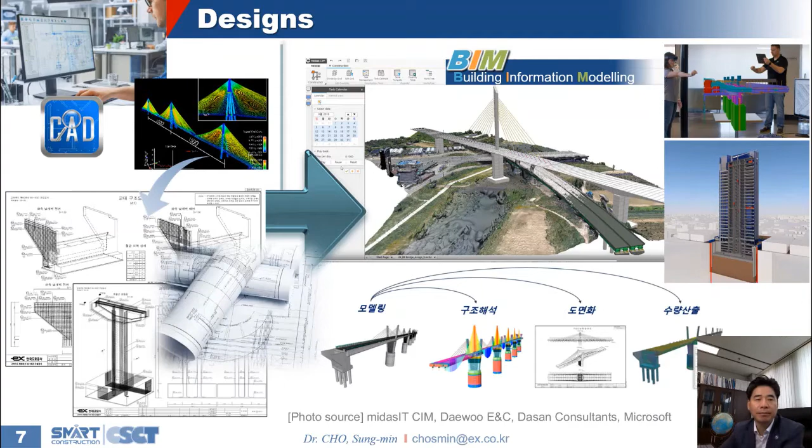How will smart construction change construction work? First, the 2D drawing-based design is changed to 3D digital modeling called Building Information Modeling, BIM. The current 2D design is changing to 3D design based on BIM. By using the property information contained in the 3D model, 4D manages the construction schedule, 5D manages the quantity and the cost, and finally, 7D management enables life cycle maintenance.

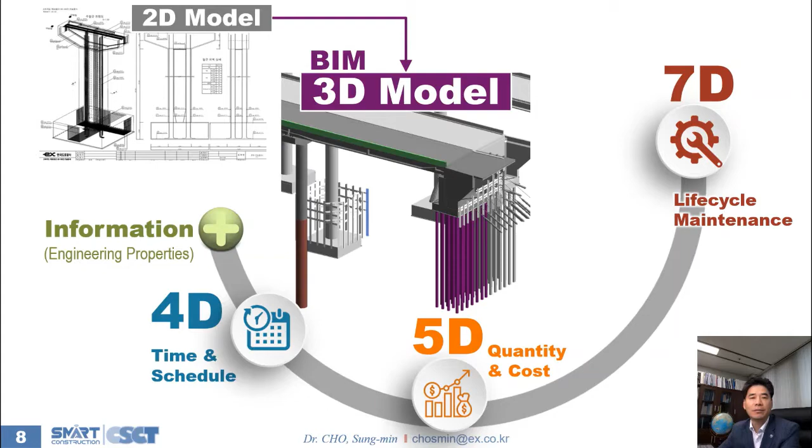I will introduce an example case of an application of BIM for interchange renovation works for road construction. The survey was conducted using a drone for the project area.

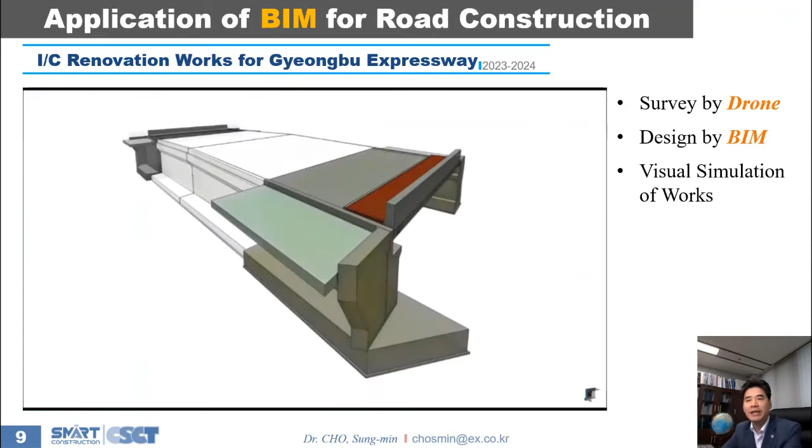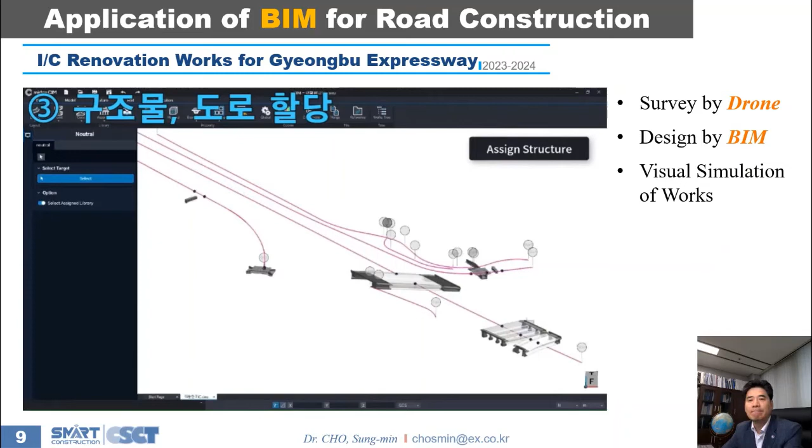For BIM design, first, the alignment and the geometry of the road were determined and assigned to the route. Next, the bridge was modeled, and this model was again assigned to the road routes. Then the earthwork section was modeled. The BIM result looks like this.

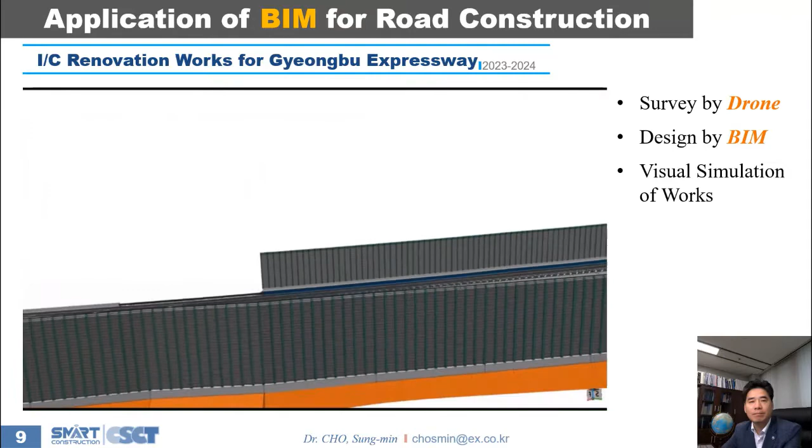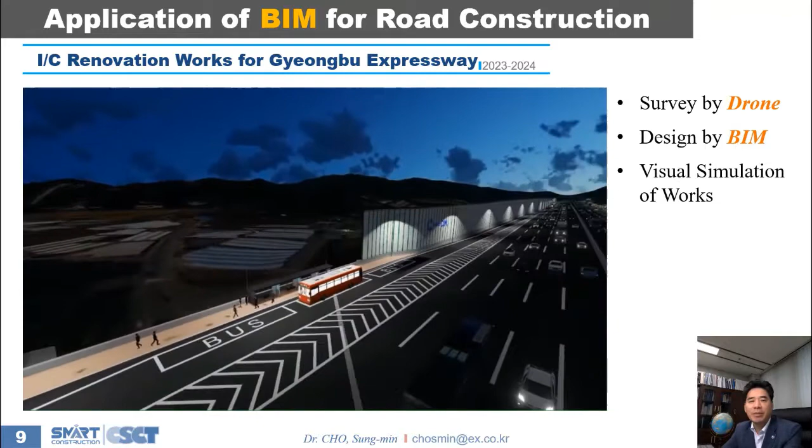We can visually check the location and the shape of the newly created ramp around the current expressway route. After the modeling has been completed, we can see the cars passing on the expressway in advance. In addition to daytime, it is possible to check the condition of the expressway by considering the lighting for each time zone at night.

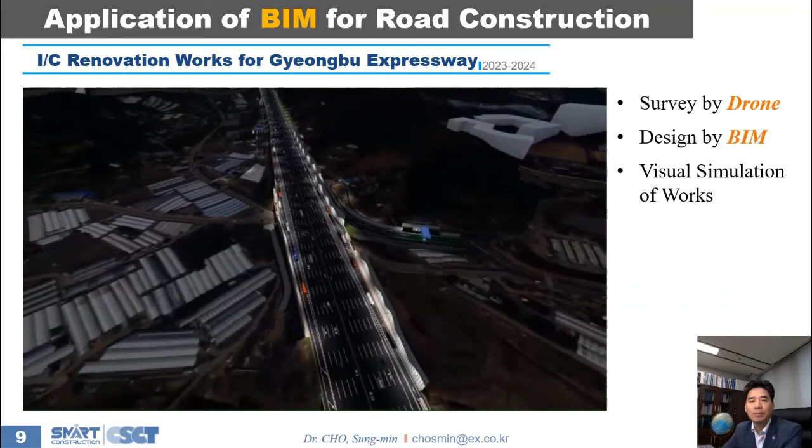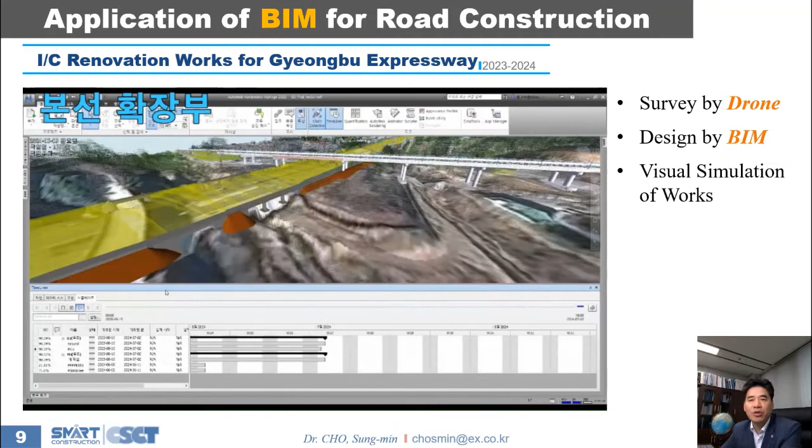Finally, it is the status of the work progressing according to the construction schedule, that is, a scene in which 4D management is performed.

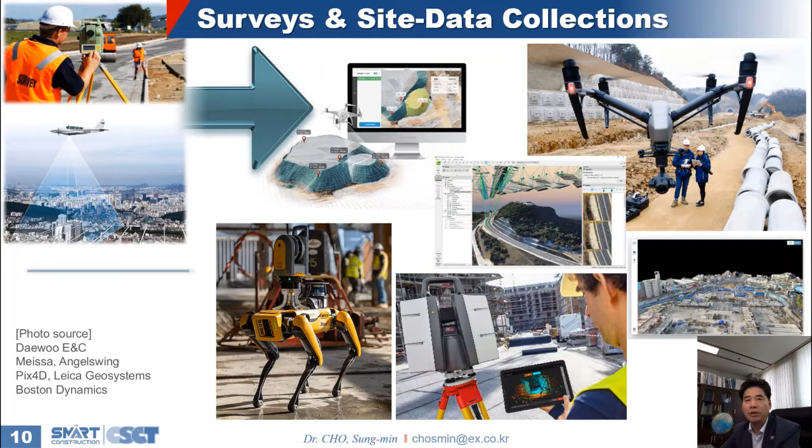Survey and data collection technologies based on UAV, UGV, camera, and LiDAR are evolving and improving rapidly. Instead of humans, drones and robots will create 3D digital maps and collect various information on construction sites. However, the abundance of solutions and systems available today can make it difficult to identify the best option for construction and civil projects. It needs to examine each system's benefits and limitations in construction management and civil engineering.

The use of mechanized construction equipment at construction sites is common. Furthermore, unmanned or remote control technologies using automated equipment are being used. We generally divide machine automation into MG, machine guidance, and MC, machine control. A trend in the industry is for guidance systems to become increasingly automated. The equipment used for earthworks is remotely controlled and autonomously operated. Graders and rollers can be operated autonomously through hydraulic system control, automatically following a set route.

Equipment put into the field is managed according to the integrated control system, and communicates with each other through pairing between equipment.

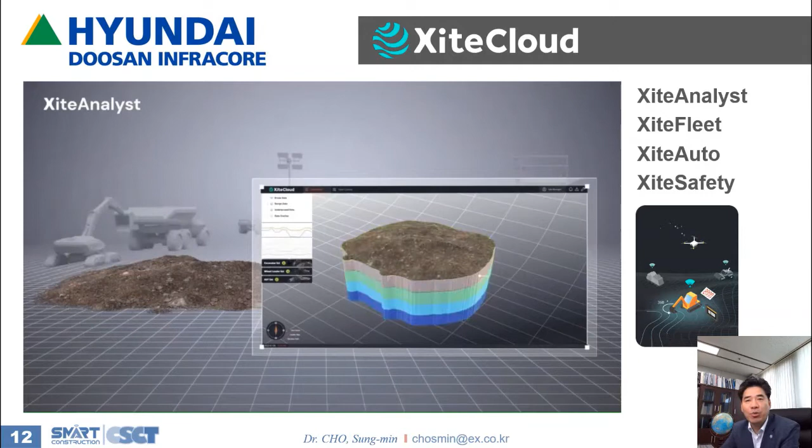XiteCloud, provided by a company that produces construction equipment, introduces digital automation technology. This digital construction platform supports management based on 3D visualization by integrating drone data, underground data, and design data, including fleet location tracking and operation monitoring in real time.

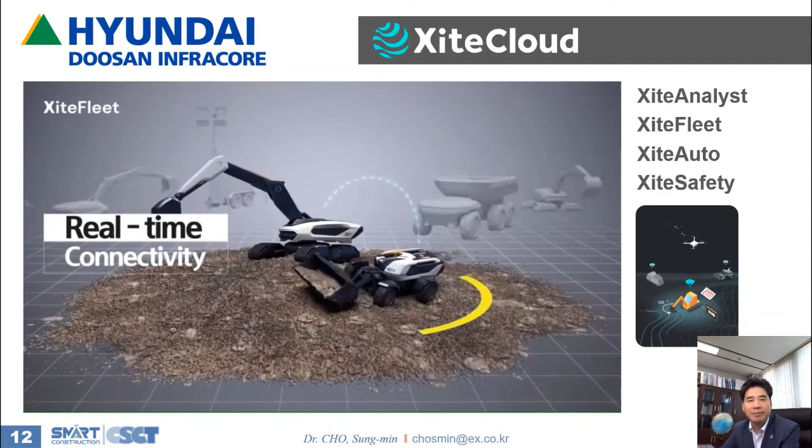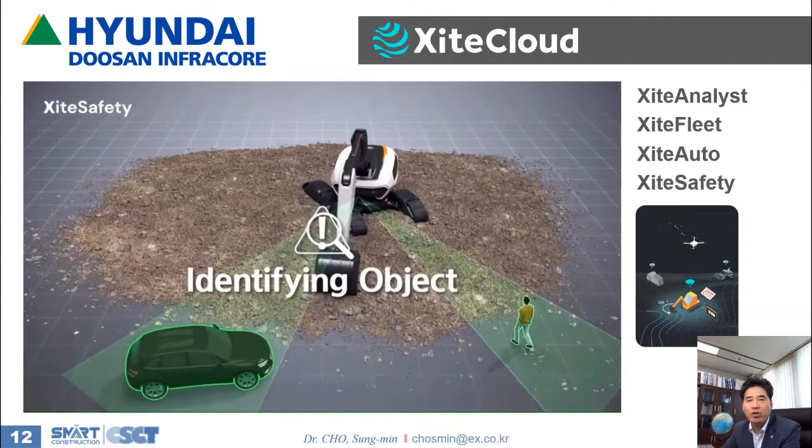XiteAuto is a construction automation system. 3D machine control combines 3D machine guidance with an automatic hydraulic control system and can be applied with a tilt rotator attachment. XiteSafety is a construction automation system that enables safety management by location tracking of construction equipment and workers with IoT technology.

The sequential construction phase is changed to a system in which design and construction are interconnected based on a digital model. In addition, off-site construction, meaning prefab and modular construction, is generally applied.

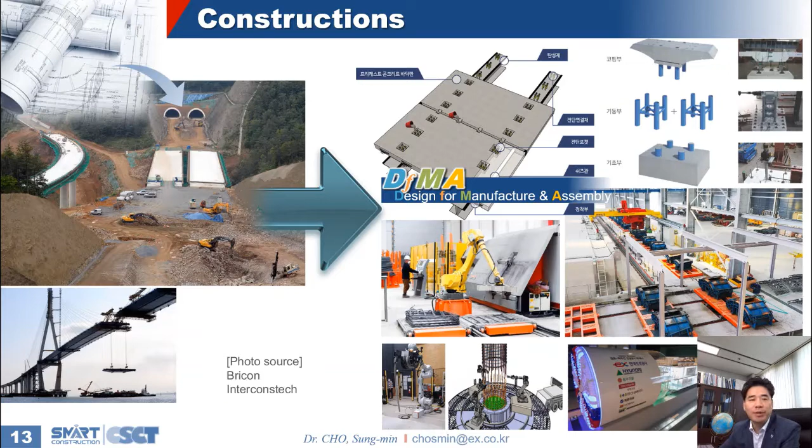The temperature during concrete placement was automatically recorded and managed using the temperature sensor and IoT communication installed in the rebar of the concrete structure.

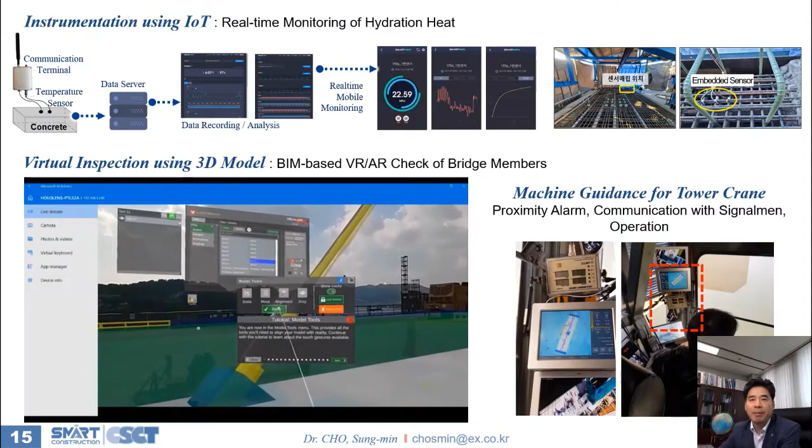Based on the BIM model, virtual reality was used to check whether the members of the bridge that had been constructed were made according to the design.

And the tower crane for the construction of a high located pylon was equipped with a sensor and communication-based proximity warning system and operated safely.

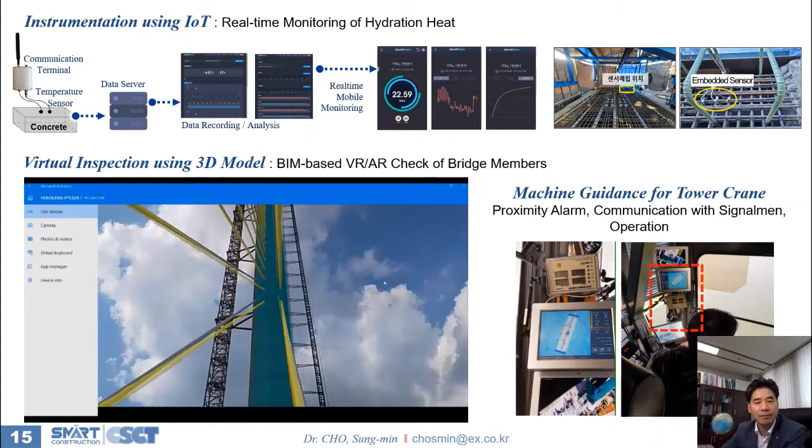A common data environment for collaboration based on BIM is also being operated for the first road tunnel construction under the Han River in Seoul, and integrated construction management using a platform consisting of a smart dashboard, digital twin simulation, and IoT system is also being used.

Web-based 4D simulation using BIM and workers' location tracking are also being tried.

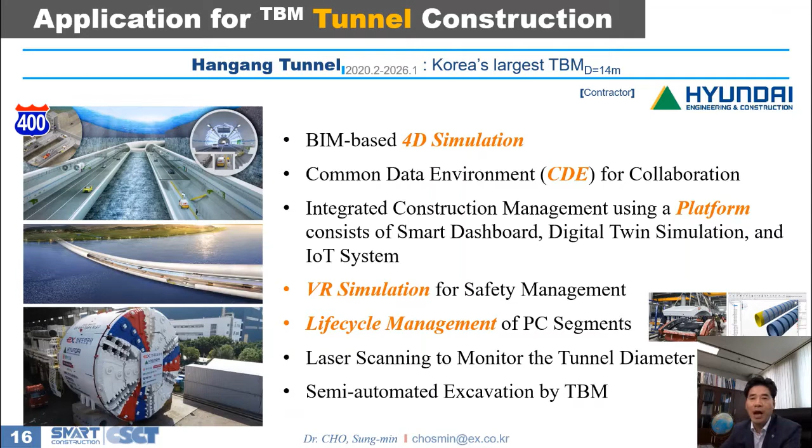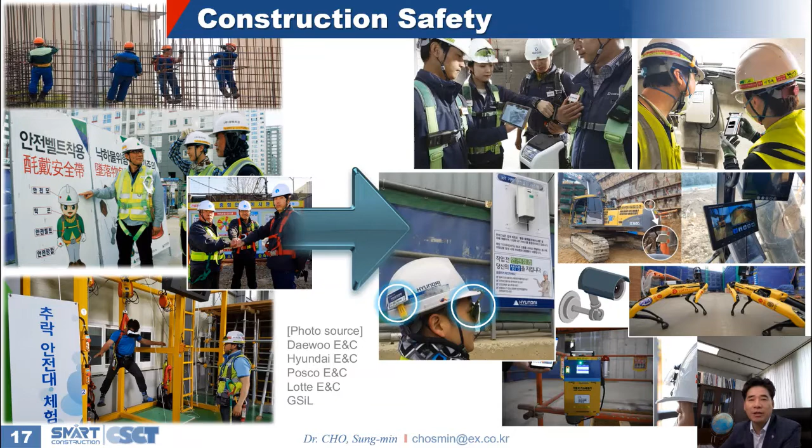Digital technology can greatly contribute to the improvement of safety in the construction industry, which is classified as the most dangerous industry due to many accidents during work. Various sensors, Internet of Things, and communication technologies will help increase the safety of construction sites. Virtual reality technology based on 3D digital models is very helpful in preventing accidents by educating workers before work.

Off-site construction cases using prefabrication and modular technology are also increasing. It is also used in PC segments of tunnel boring machines, tunnels, culverts, etc.

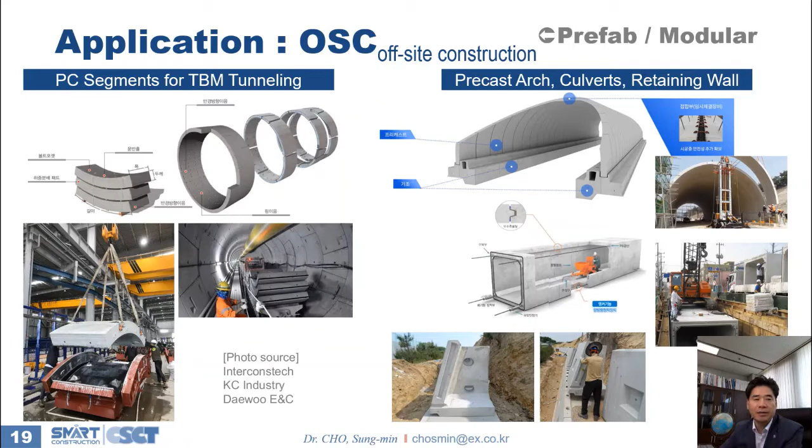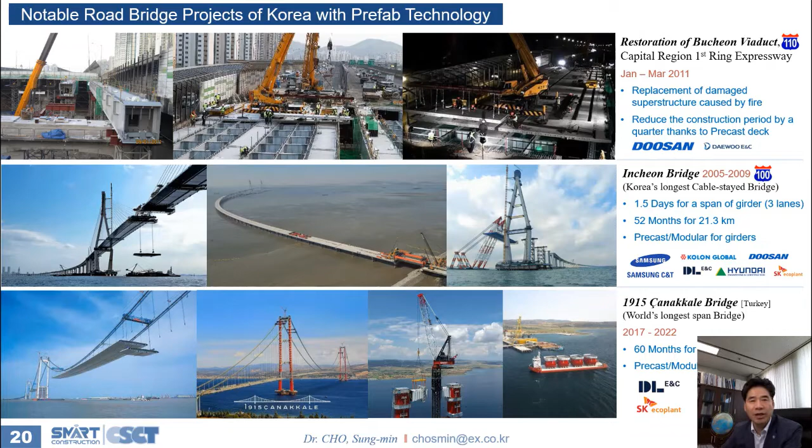This OSC technology is also widely used in bridges. Incheon Bridge, Korea's longest cable-stayed bridge, and Turkey's Çanakkale Bridge, the world's longest suspension bridge, completed last spring, are results of the accumulated prefabrication technology of Korean construction companies.

In 2020, the Korean government started a large-scale research program to develop smart construction technology by 2025. This program consists of a total of 12 projects in 4 areas: earthworks automation and site data collection, prefabrication, design for manufacture and assembly and structure automation, smart construction safety, and data digital delivery platform and test beds.

The ultimate goal is to use digital technology to increase productivity and digitalization in the construction industry, and to lower the construction period and accident rate.

The Center for Smart Construction Technology of KEC is leading the program, which has been funded by the Ministry of Land, Infrastructure, and Transport. 131 organizations take part in this program.

As mentioned above, the research program consists of 12 projects in 4 areas, 3 projects in each area. The first group researches intelligent control of construction equipment, collection and analysis of site information, and digitalized automation of construction equipment. The second group researches BIM-based support of design, fabrication, and construction for prefabrication.

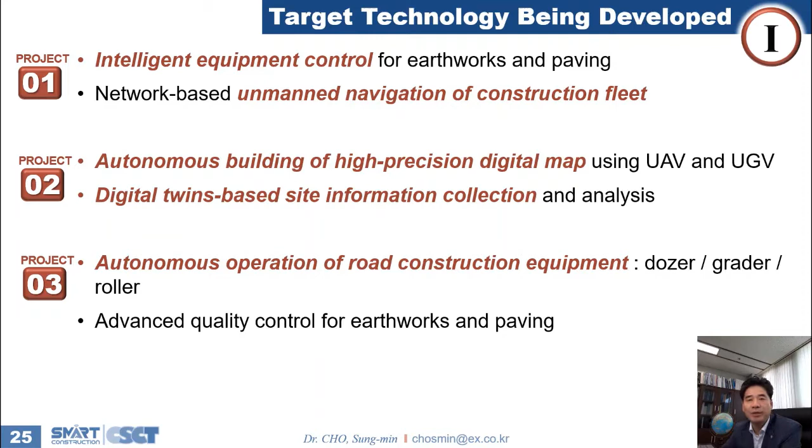Earthworks automation and site data collection: this is to develop technologies by integrating site information acquired through autonomous measurement using drones, unmanned ground vehicles, and various sensors to create a digital map, combined with equipment automation for road construction. Target technologies are intelligent equipment control, unmanned navigation of construction fleet, autonomous building of digital map, digital twins-based site information collection, autonomous operation of equipment, and advanced quality control for earthworks and paving.

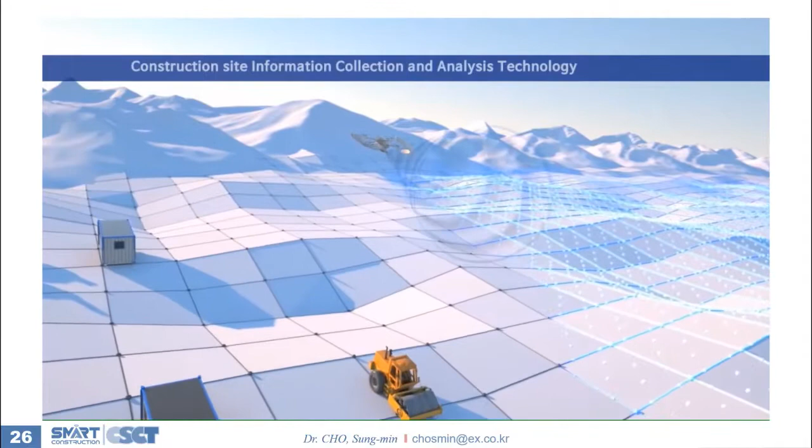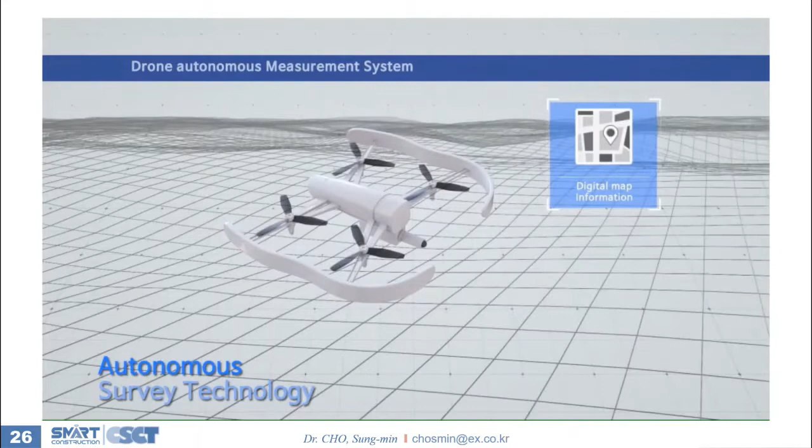To digitize the topographical information of construction sites, we are developing AI-based drones and ground-moving platform UGVs that can operate autonomously. By integrating the on-site topographic information acquired through the drone autonomous measurement system and UGV, it creates an ultra-precise 3D digital map required for construction works, such as earthworks and pavement works.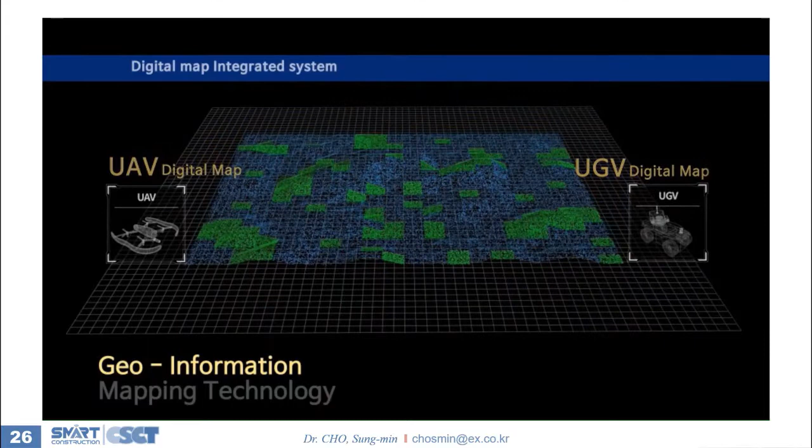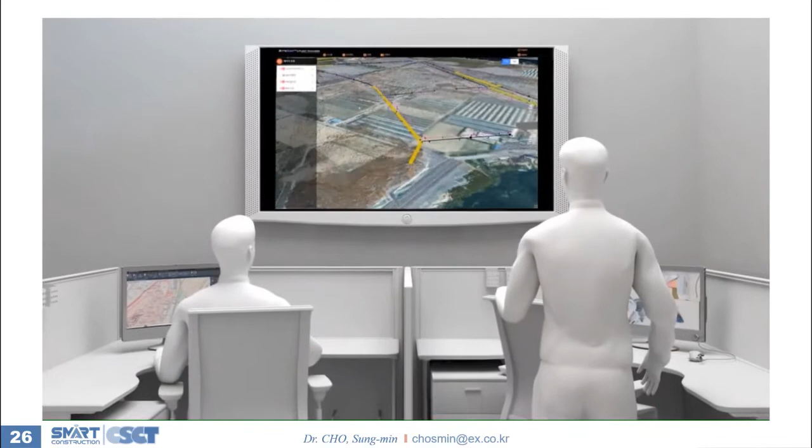The manager can view the site's topographic information that changes every moment in the control center. It is a mobile control center equipped with an intelligent construction equipment control platform. By reflecting real-time field information based on AI, it can autonomously judge and respond to the operation of construction equipment at various levels of automation such as MG, MC, and unmanned remote.

Intelligent control technology is the interaction between equipment and the control center, or between equipment and equipment. The productivity of earthworks and pavers' work is dramatically improved. Through communication between different types of equipment, such as dumps and dozers, it is quickly determined which equipment to pair with when two construction equipment approaches within a set range or arrives at a designated location.

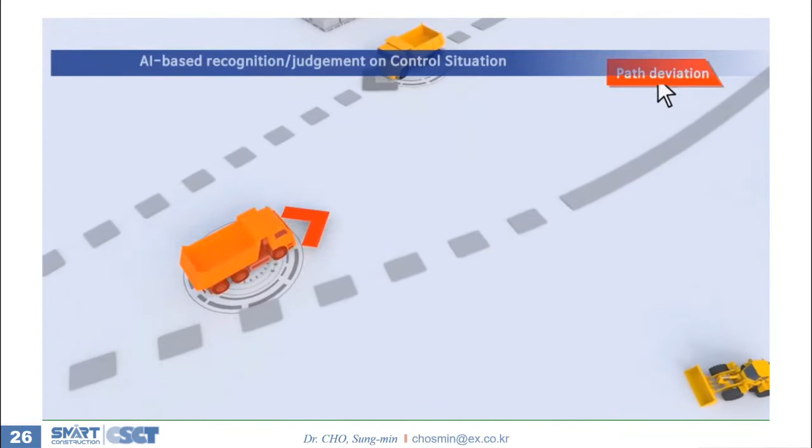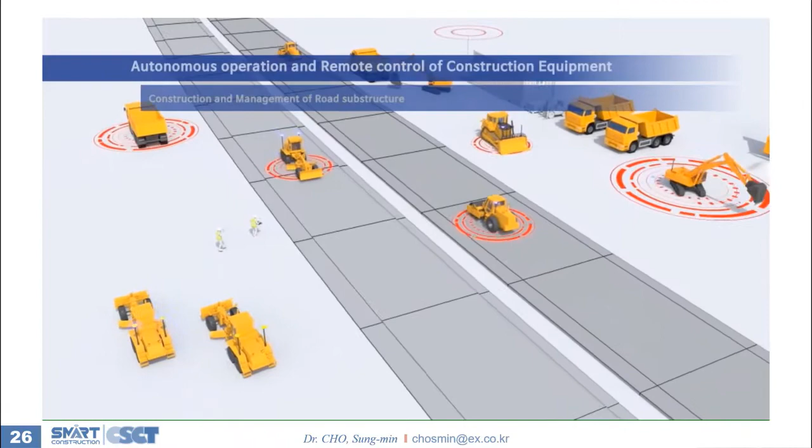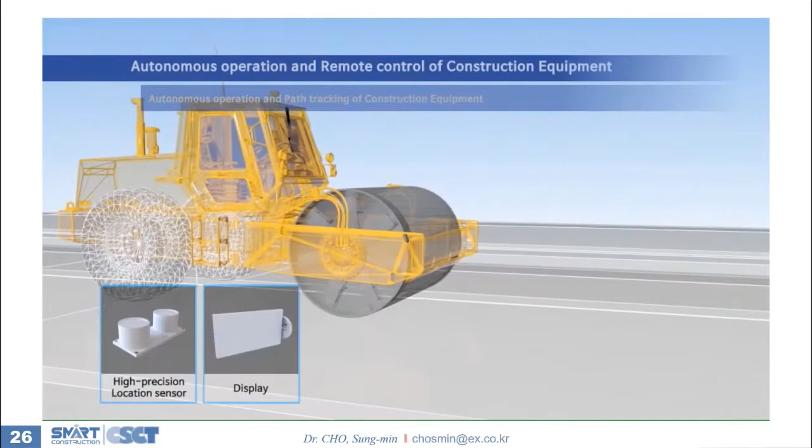We develop intelligent construction equipment capable of autonomous work, driving, and remote control. It utilizes high-precision electro-hydraulic control technology to realize the automation of the operation of rollers, graders, and dozers. It monitors construction quality and work volume in real time through sensors linked to the equipment. The equipment follows the planned route by itself and runs, and it is possible to avoid unexpected obstacles.

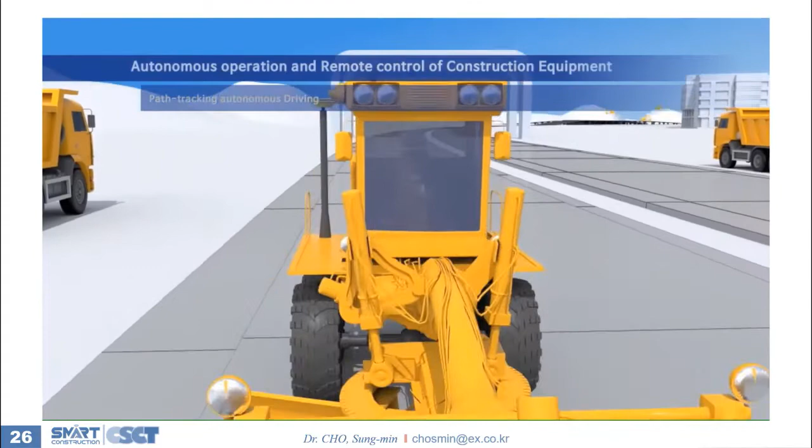By utilizing the pendant remote control interface, remote control can be performed quickly on site in case of emergency, and remote control is possible even from a distance from the control center.

Prefabrication according to design for manufacture and assembly, and structure automation: development of technology that employs BIM, artificial intelligence, 3D scanning, prefabrication, and robotics to improve the design, fabrication, construction process, and support collaboration between each process to build bridges and tunnels. And development of a remote control and automation technology for structure construction to address the factors that impede productivity due to dangerous and poor work environment.

Target technologies are digital engineering modeling of prefabricated bridges, manufacture and assembly of prefab members of bridge, automated construction of piers and girders for bridge, artificial intelligence-based operation of tunnel boring machine, configuration control of prefab bridge construction, and structural integrity monitoring of prefab members during transport.

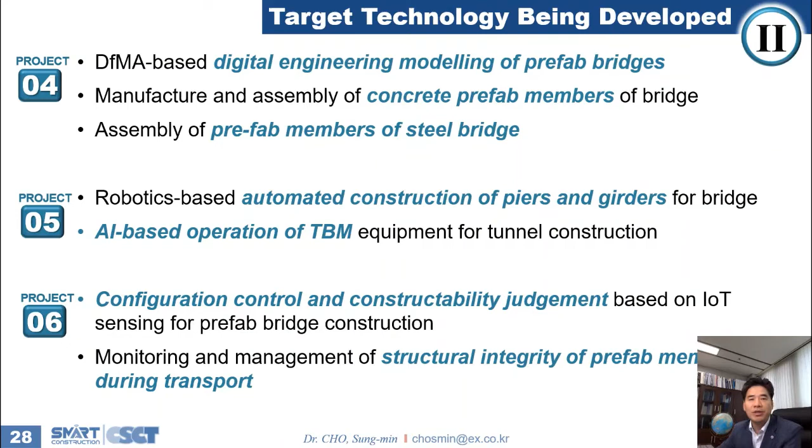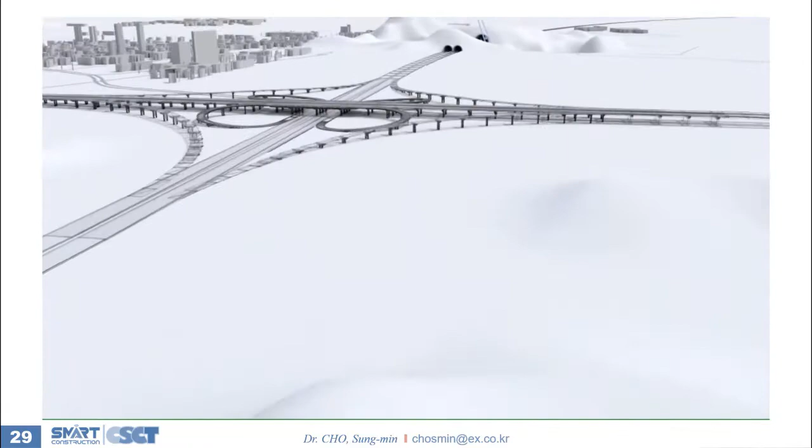The second field of smart construction development project is to develop prefab structure design, manufacturing, and construction support technology based on data-driven engineering. Digital engineering model is a technology to design an automatic connection with road alignment. By simply inputting data, the structure reflecting the road alignment is automatically designed and a BIM model is created.

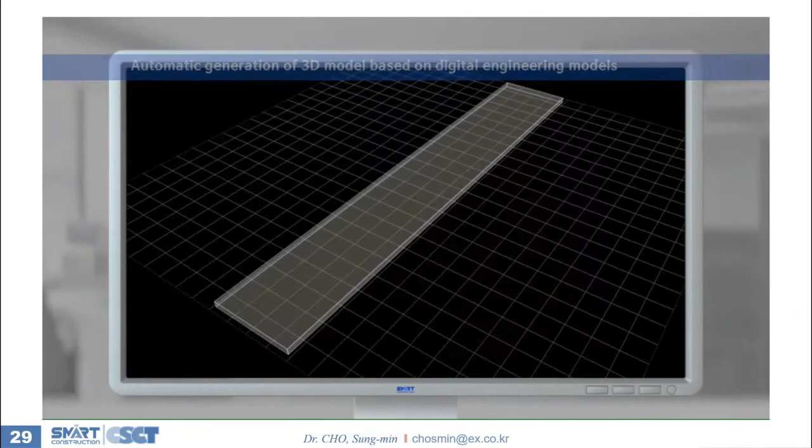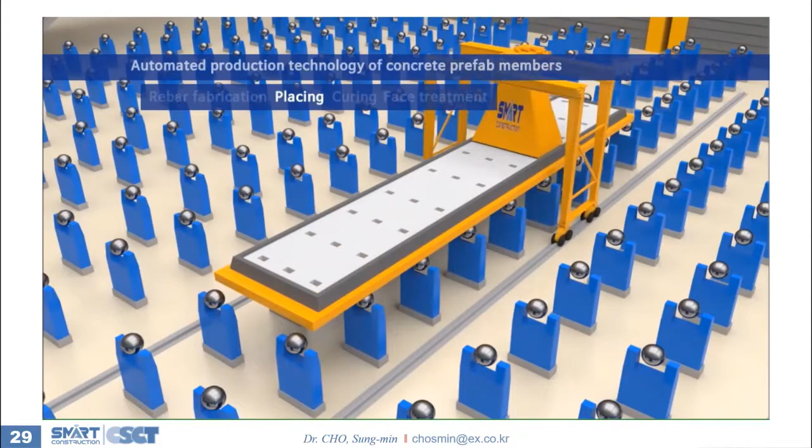DfMA is an abbreviation of Design for Manufacture and Assembly, and is a design technology that interlocks prefab member manufacturing information. Using this technology, prefab members are automatically produced through the process of rebar assembly, casting, curing, and face treatment by robots.

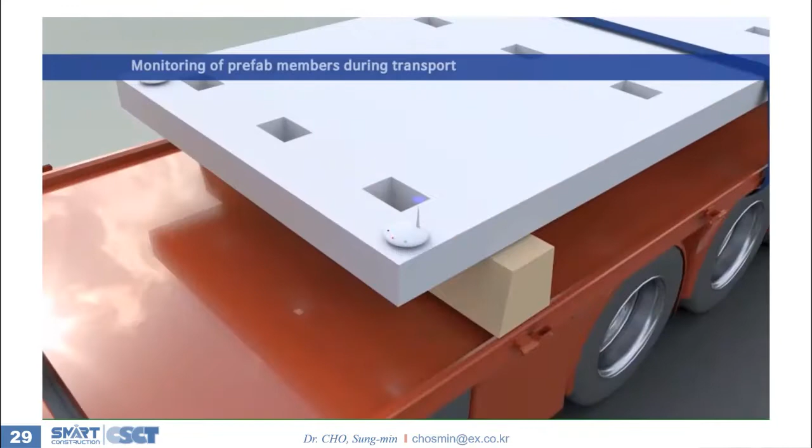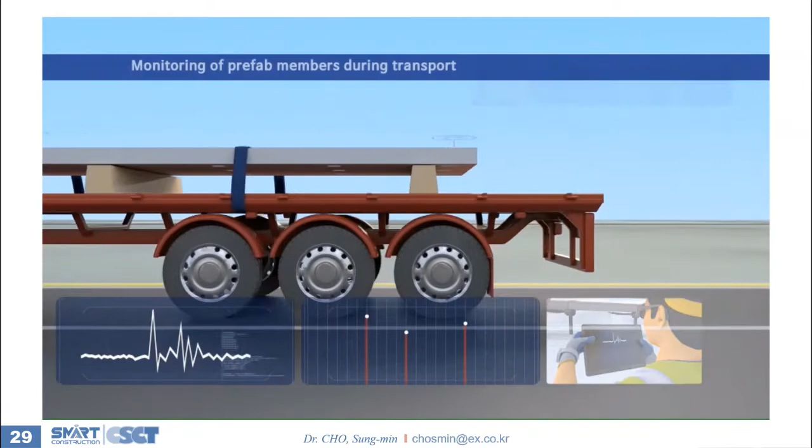It was developed so that the quality test is automatically performed through scanning the member. The prefab method necessarily includes transportation procedures. Even if the manufacturing quality is secured, prefab members can be damaged during transportation. Quality track technology is being developed using smart sensors during transportation in order to minimize on-site manpower.

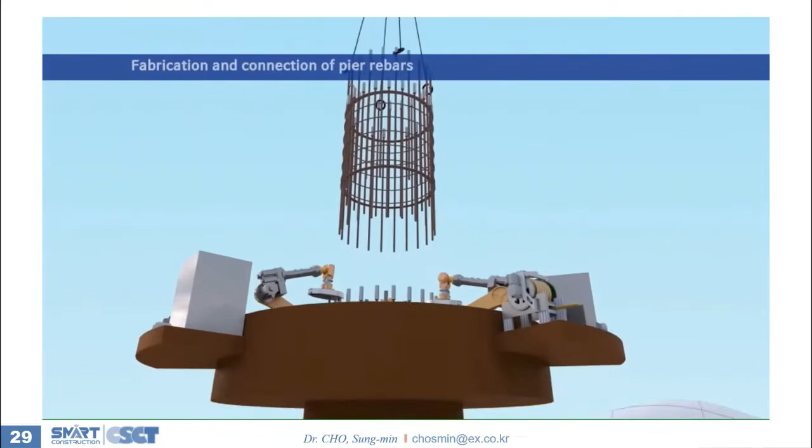A construction technology is being developed that remotely controls the robot from the control center. From the existing method using slip form, a construction technology is being developed to automatically raise the formwork and connect the rebar using a special robot.

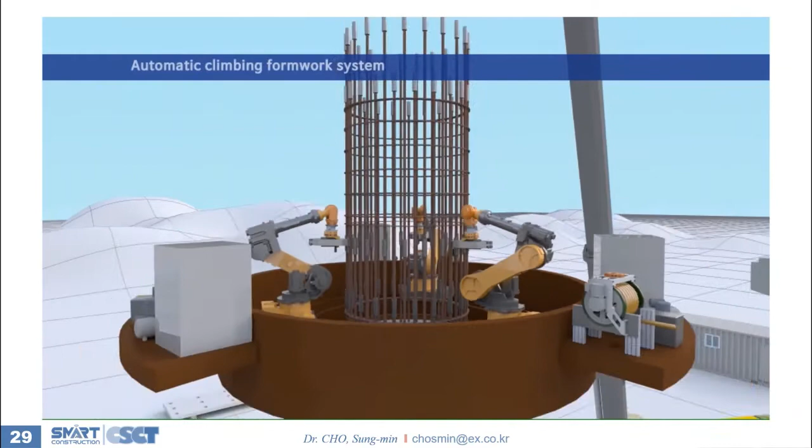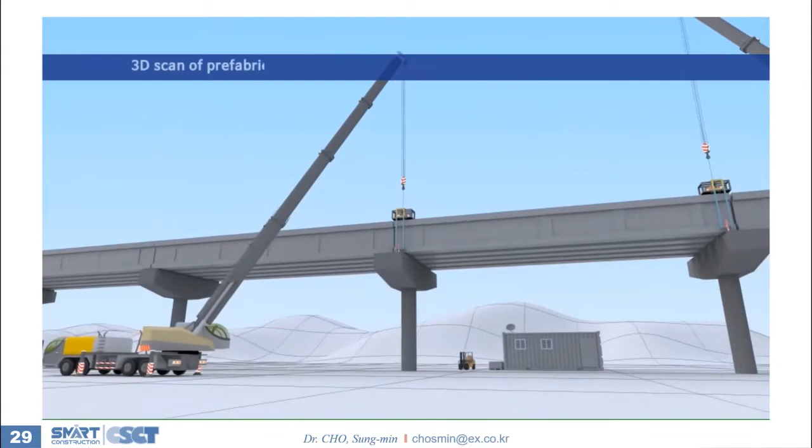Can be performed remotely and precisely. We try to minimize on-site manpower in construction and prevent equipment collision accidents. A multi-crane collaboration system is being developed to minimize on-site manpower in construction and prevent equipment collision accidents.

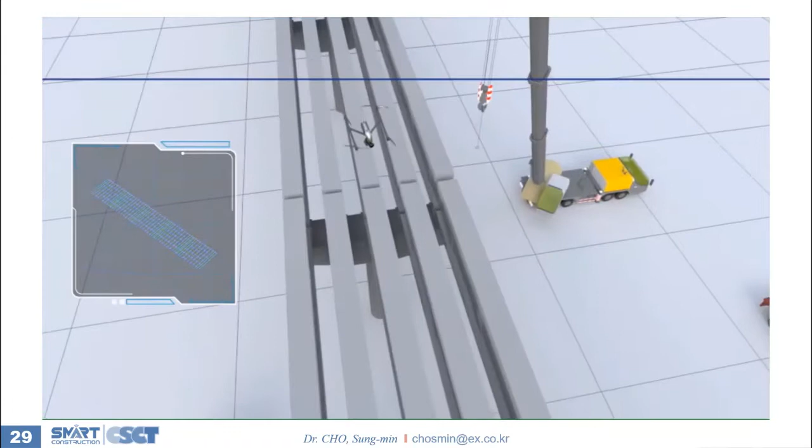In the whole process, the assembly process of girder slab is the most difficult. To assist with this, we are developing a technology to determine constructability by pre-comparing site and member scanning information.

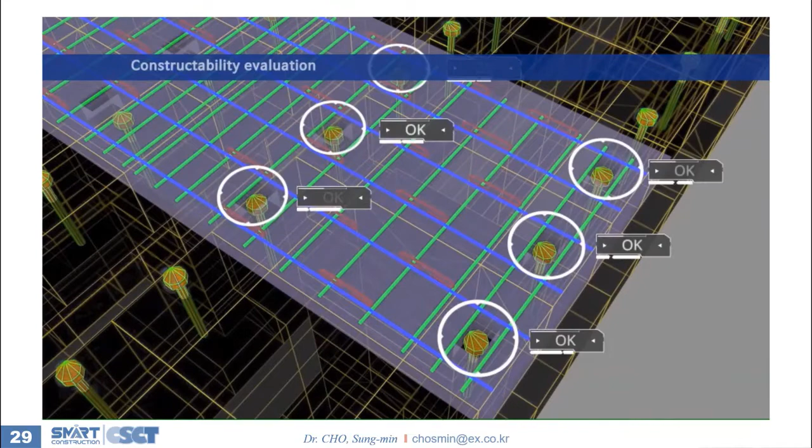Like this, developing data-driven smart construction technology is going on.

Smart construction safety: development of a smart safety integrated control system using cloud, big data, artificial intelligence, Internet of Things, sensor network, and edge computing. This is a system capable of detecting, assessing, and predicting risk factors that may occur during the installation, dismantling, and operation of temporary structures that are relatively disregarded in management.

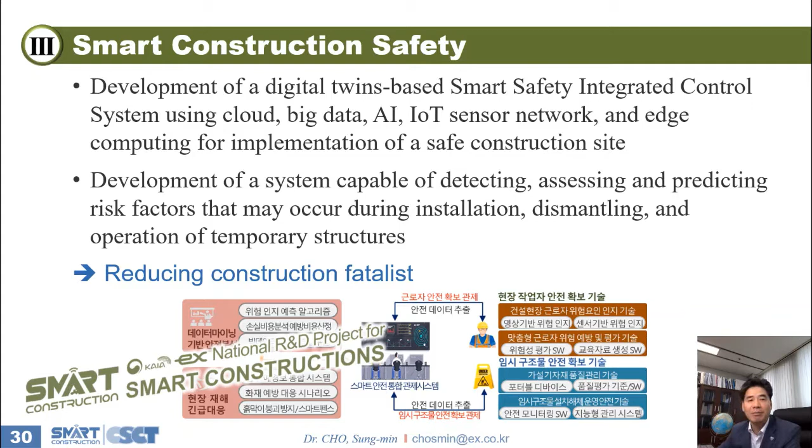These areas' target technologies are data mining-based safety analysis, emergency response technology, safety control system based on digital twins, automatic detection of hazard factors of workers, risk assessment, and quality verification of facility and material for temporary use.

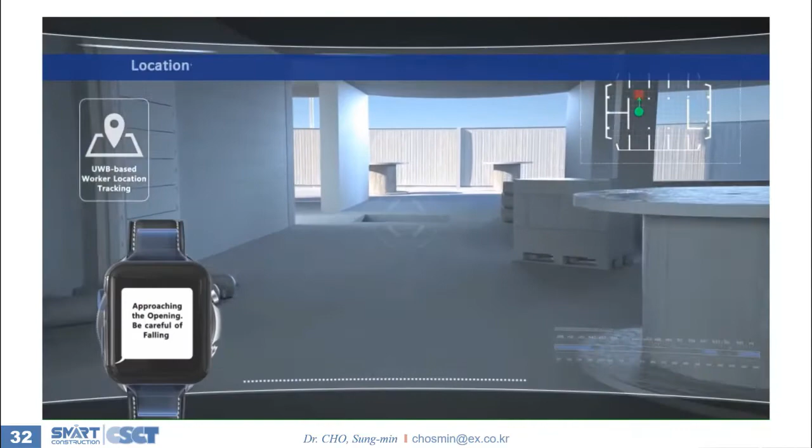Worker wearing smart safety device. Let's go to the test bed site. You can check various risk factors in the field based on location and image and take action in advance.

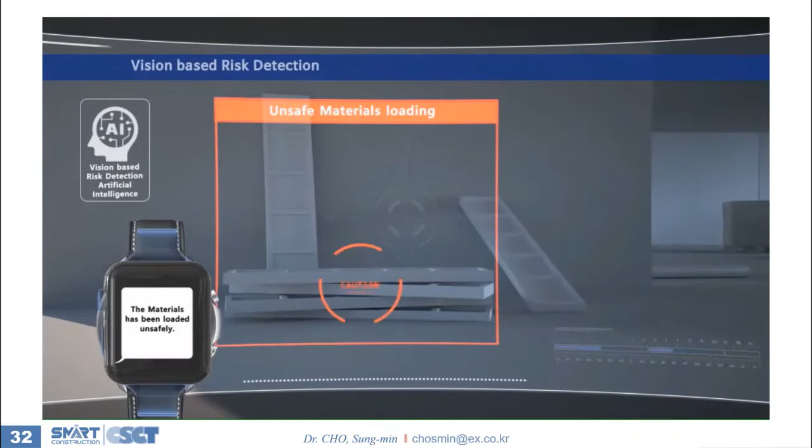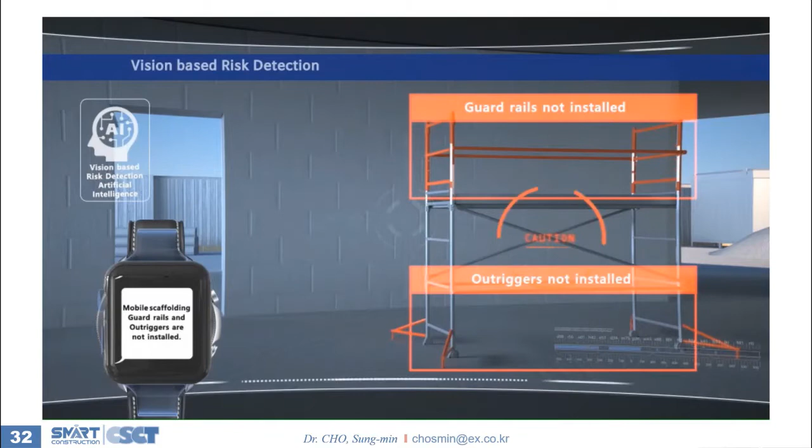Various sensors enable real-time on-site change measurement, worker abnormal behavior, and non-compliance detection.

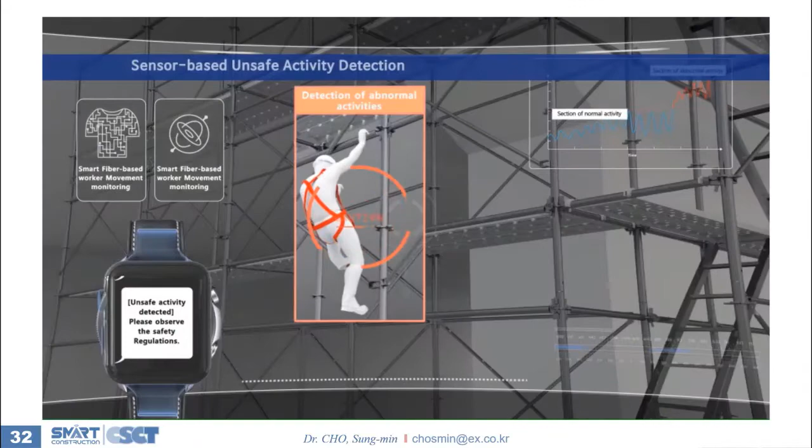Temporary equipment damage and crack information can be detected.

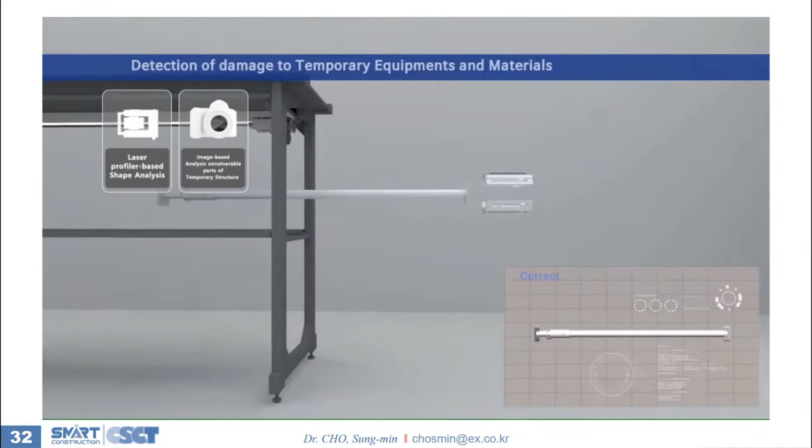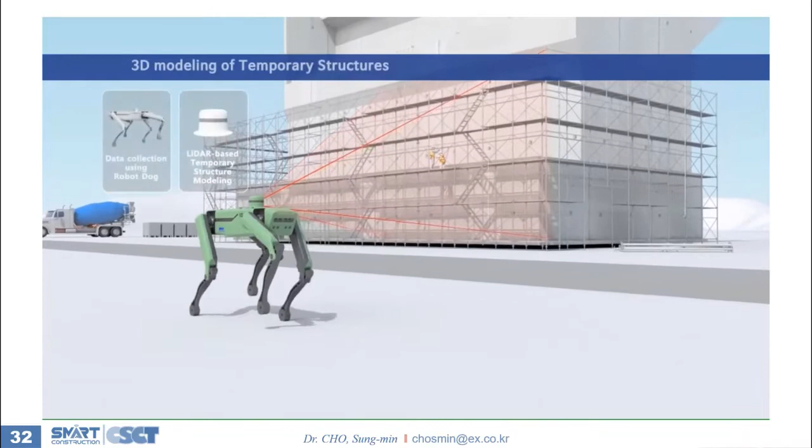A robot dog equipped with LiDAR can remotely check the 3D shape information of temporary structures and determine whether there is an abnormality.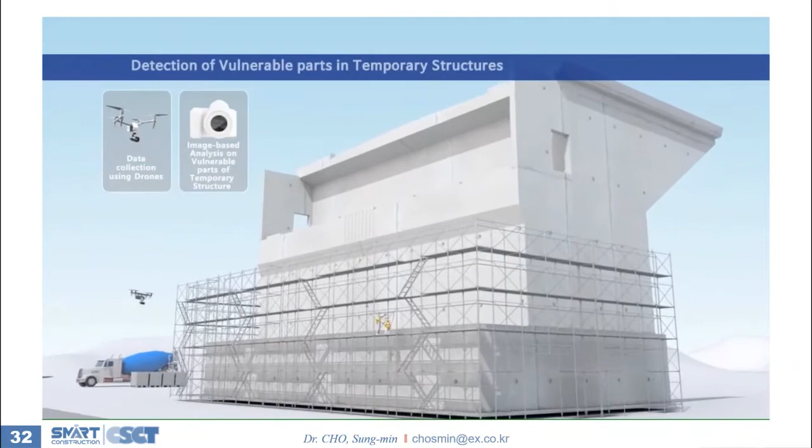A drone equipped with a camera can perform inspections on vulnerable parts of temporary structures.

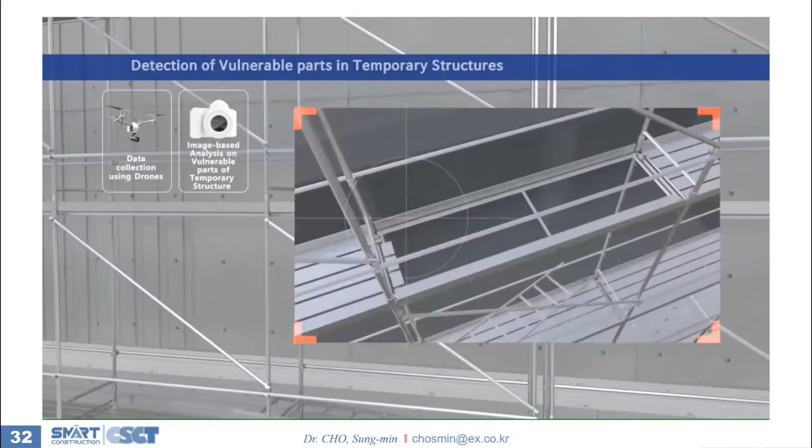Construction sites are controlled in real time through video, and dangerous situations such as emergency disasters, such as fires and earthen barrier collapse, and worker collisions can be monitored and responded to based on the safety control BIM.

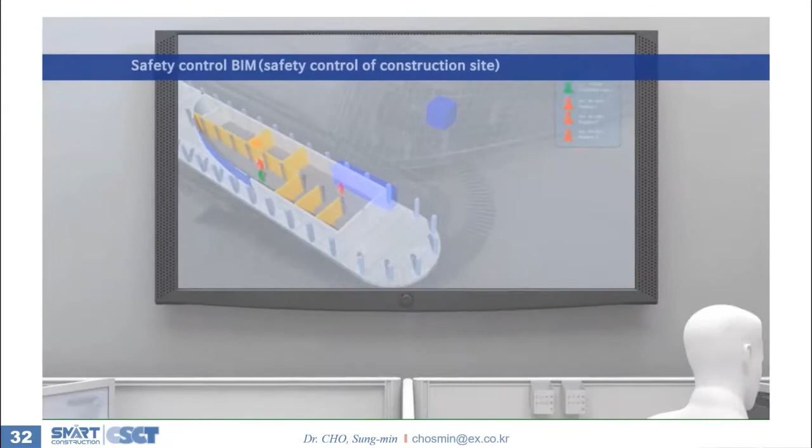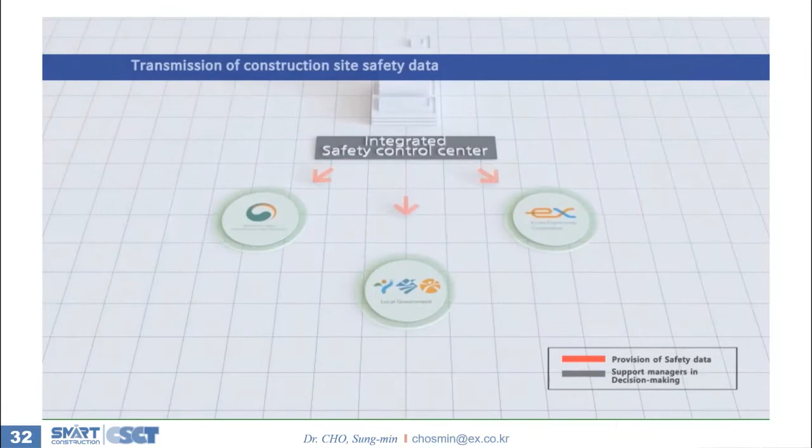Safety-related data for individual sites is managed by the Integrated Safety Control Center, and this data is provided to the government, local governments, and the Korea Expressway Corporation General Operations Center.

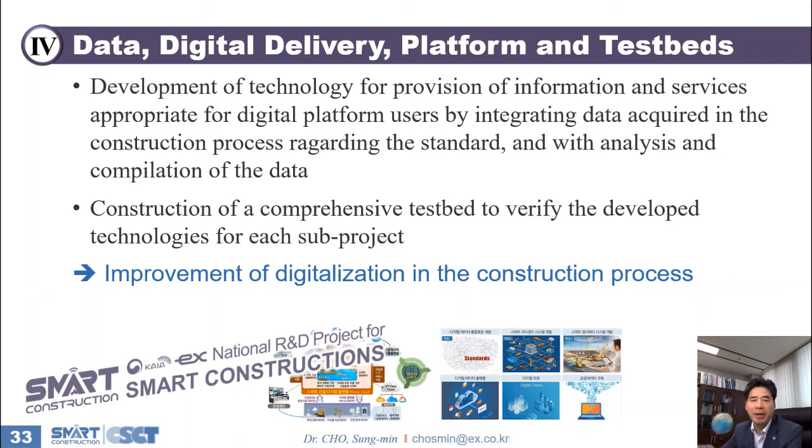Data, digital delivery, platform, and test beds. This is to develop the technology for provision of information and services appropriate for digital platform users by integrating data acquired in the construction process regarding the standard, with analysis and compilation of the data, and operation of comprehensive test beds to verify the developed technologies.

The fourth area's target technologies are integration and standardization of digital data, knowledge management system, digital delivery system for prefabrication, real-time data collection, building of a digital platform, construction simulations and visualization of construction process using digital twins and artificial intelligence, operation of comprehensive test beds, and policy development.

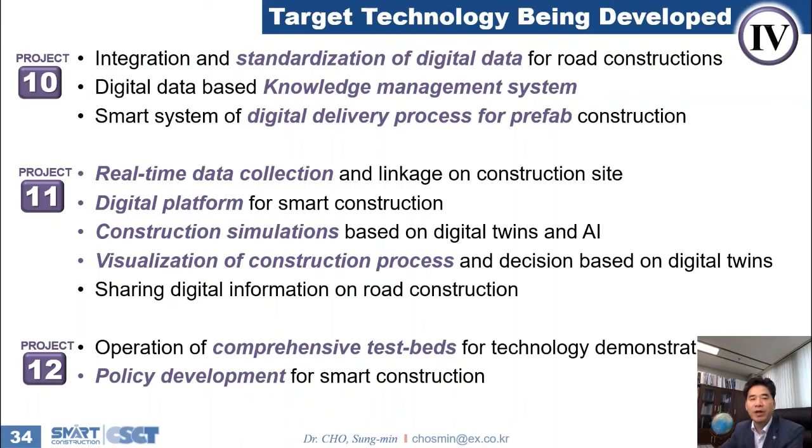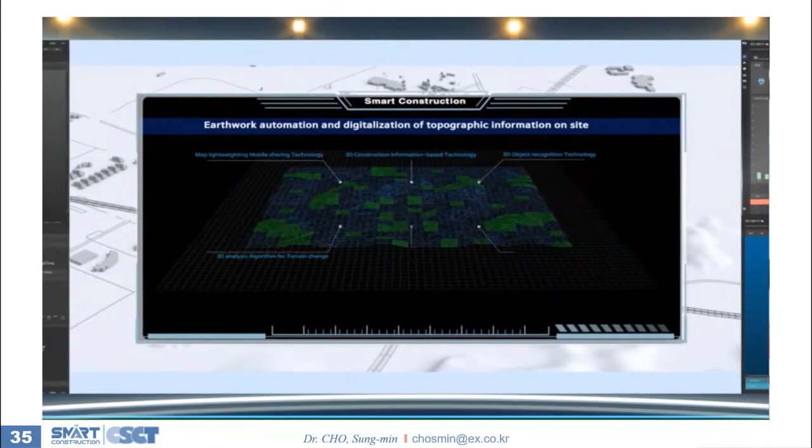Topographical and earthwork automation data in the first focus area is collected from the on-site edge system, and the information processed on the platform can be checked at the General Operations Center.

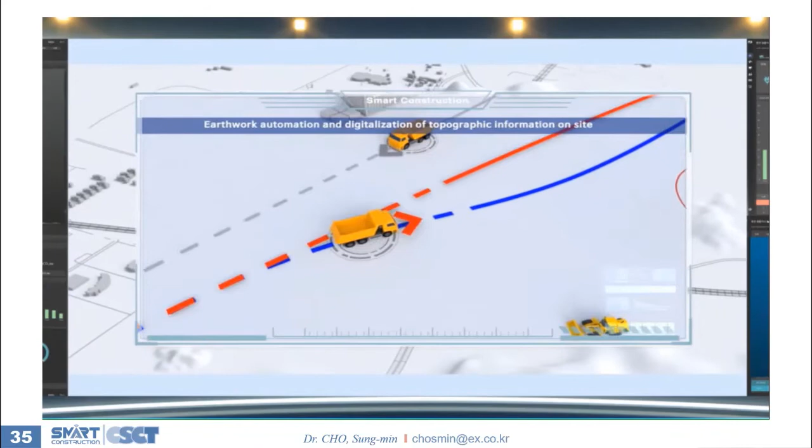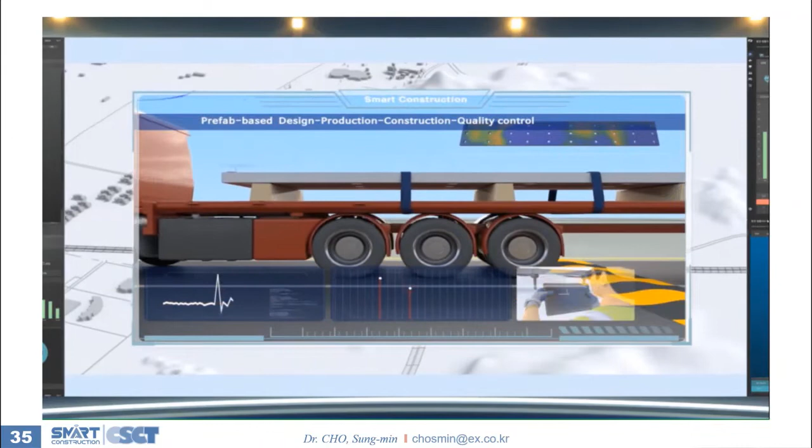Prefab structures in the second focus area also provide information from design to manufacturing, construction, and quality control. You can check it through the platform.

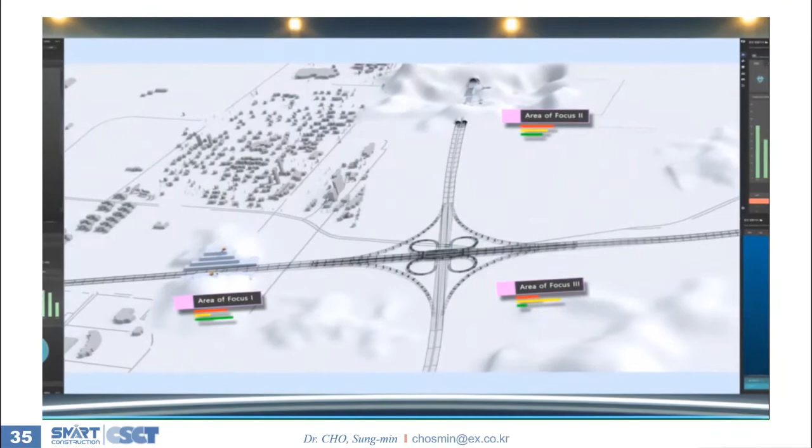Construction site safety information in the third focus area can also be controlled by the General Operations Center, and the related information is delivered to the relevant organizations to respond quickly.

As such, all data from the test bed site is collected through a digital platform and processed into information that can be exchanged and utilized through data standardization.

By applying image processing and machine learning technology to various structured and unstructured data such as BIM and IoT sensor data accumulated in the data lake of the platform, digital twin-based decision-making can be made.

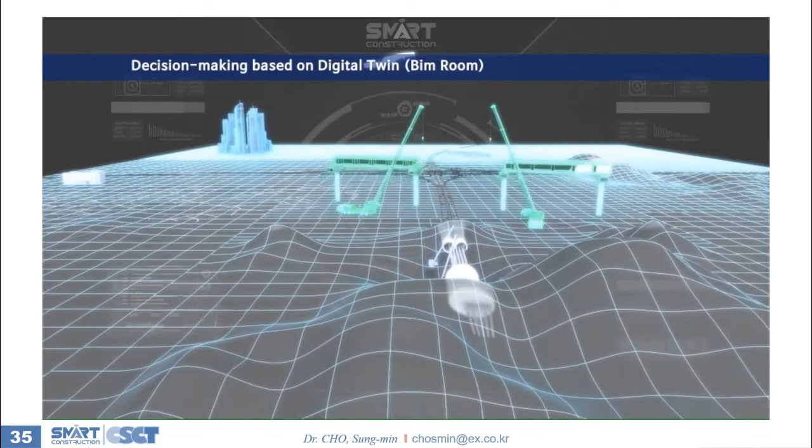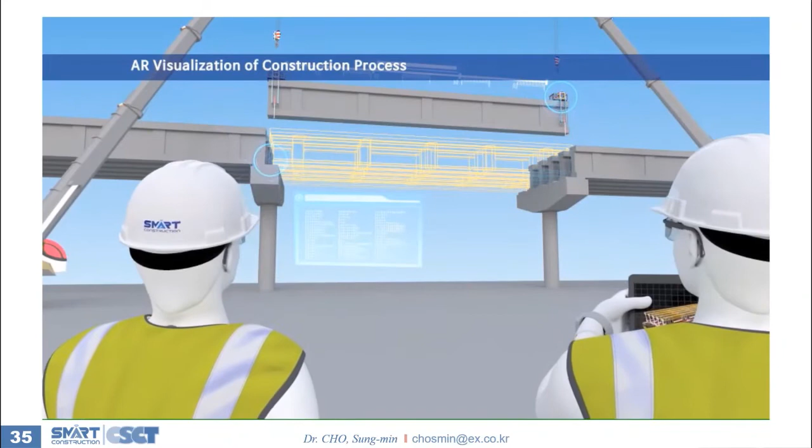In the office, you can simulate the construction process in advance in a virtual environment through VR. In the field, you can immediately check the necessary information during construction through AR. A chatbot that can recognize both voice and text transforms fragmented data into knowledgeable information.

In this way, digital transformation of construction sites is realized by collecting, utilizing, and sharing all data through the cloud-based platform.

The driving forces of smart construction are the enormous increase of data, new technologies, distinct benefits from practices, the government's strong drive, and desperate hope for carbon neutrality.

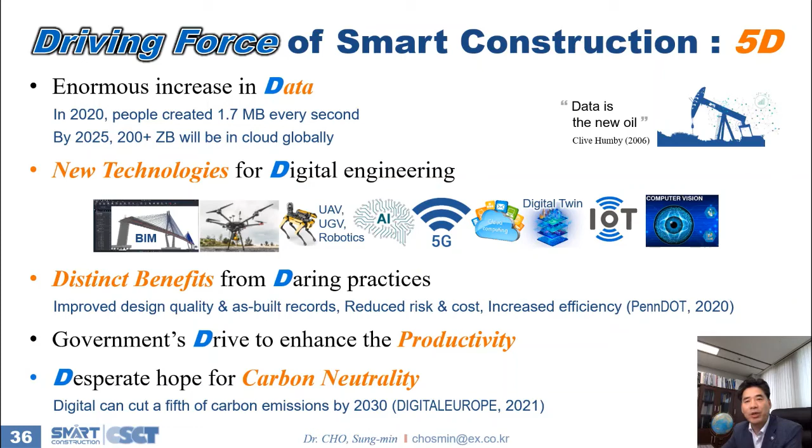As I wrap up the lecture, I'd like to share some thoughts to open a new horizon of smart construction. Who is the leader of digital transformation in the construction sector?

BIM is just an essential tool. Data is the key. Digital transformation is an entirely new one. So, we need to find a new value for smart construction. Thank you.